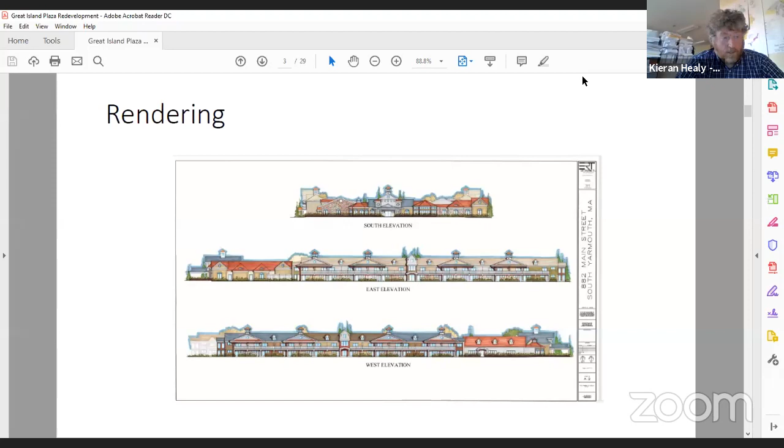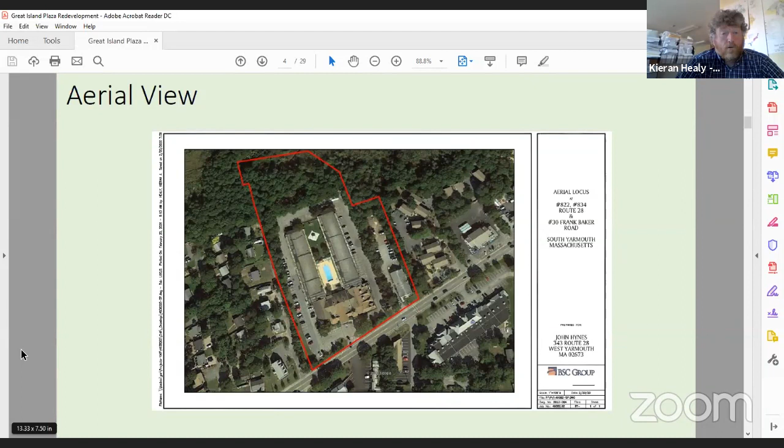If I go on to the next page, please. This is a general aerial locus of the property. You'll see the blue in the middle, that is the current 822 building. To the bottom right, still within the red area, is 834. And then on the back, the wooded area is the Frank Baker Road site. All 3 of these will be combined as one and will be treated as one going forward if the special permit is approved. The next slide, please, Kenny.

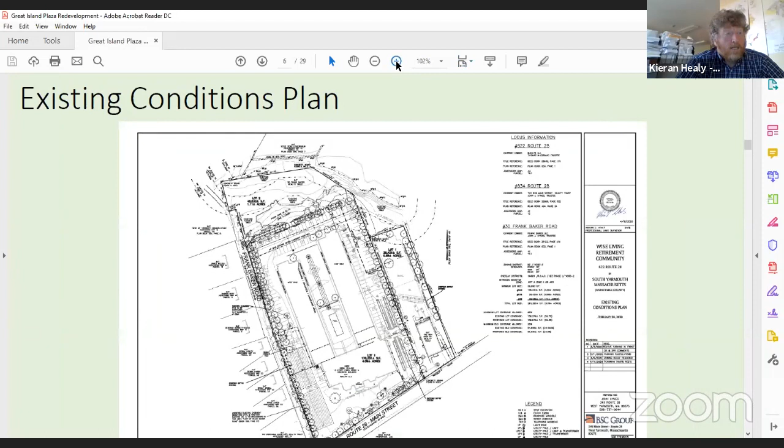This is the existing conditions. There are a lot of lines on this plan, and I'm sorry for that, but there's just a lot of underground utilities, a lot of different things going on subsurface here. The wetlands are delineated at the rear. Parking lot is the parking lot that exists. We're not extending the parking lot in any form going to the north towards the wetland. We are extending it approximately 2 feet on the west side towards Frank Baker Road. It will still conform with the 20-foot setback, but it just allows those parking areas to be full size on that westerly side.

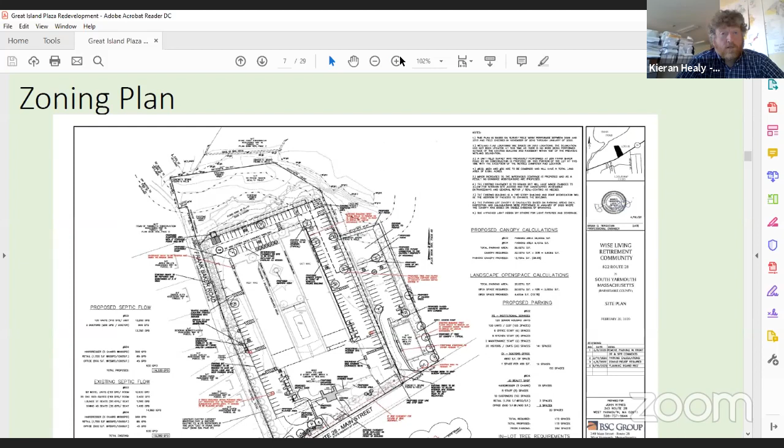This, I guess, here is the area where we've got the most visible improvements going on. The areas in red are, as we spoke at the last meeting, areas where we've specifically looked for some relief. If I start on the back left, Patty, and we'll just go around clockwise, make it easy for everybody. So the first red line you see back there basically is an overhang that we're going to put over the doorway to break up that line right there.

It is not enclosed, and as a result, that's one of the things that we will be looking for relief on. Going further south, you will see a red circle and then a further line with red text. That is the two areas where we're looking to get relief, where they're directly over a septic system. It is possible to put in the trees there, but it would be very close to septic systems and it would be difficult to maintain. So we're looking to get relief so we don't put ourselves in that position.

The next thing we talked about was the easement, all the way along. The requirement is to have a sidewalk running all the way along the property on Route 28. We'll be looking for relief in the future to not put in the sidewalk, but put in an 8-foot wide easement right now. Any of our plantings that we put in will be held back from that 8 feet so that they don't interfere with the ability to put in the sidewalk if the state were to widen the road at some stage.

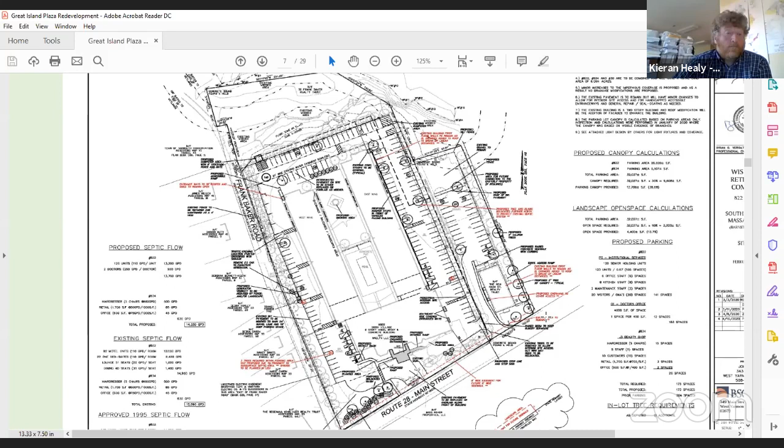All right, thank you. Just speaking of the water lines, one of the things that's been agreed is that sprinklers will go into the rear portion of the building where the living units are. So that's part of the proposal. Then if we go on to the next page, Guy, please.

So this is just showing you the subsurface utilities that are there. There's no real need to discuss them. There is plenty of drainage and the septic system. We're working with the state right now to get confirmation from them. They have preliminarily approved it, but we don't have anything in writing as of yet to maintain the existing septic system and the flow that goes with it. So that's this particular slide.

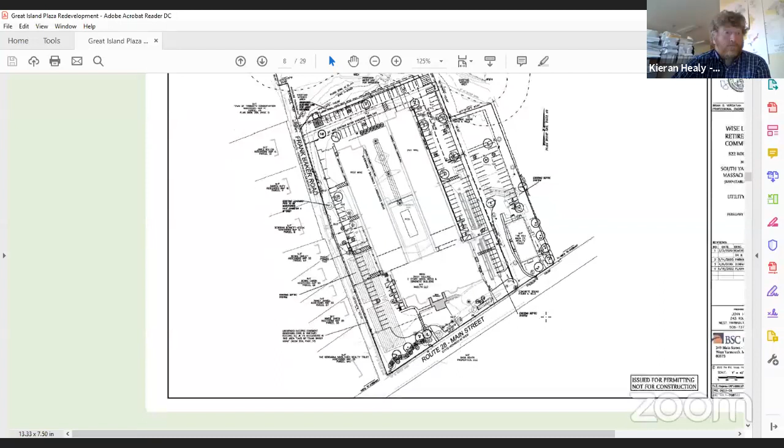And then next one, if I could, Guy. So the next one is some general details, the site planting plan, and the most important, I guess, would be the access for the fire department apparatus. The red that you can see in the center of your page right now is a turning template that we've used based on the town of Yarmouth's fire truck.

It's the ladder truck, so it's the largest vehicle, and the location of the entranceway should not interfere with that turning into the property. They can easily go in and take a left and go around the building that way, but we want to be sure that they can go around the building and go to the right as well. And that appears to be the case with this turning template based on the information that the fire department gave us.

South of that, you will see that there is a car, just an auto turn for a passenger vehicle that basically allows somebody to depart the vehicle underneath the porte cochere and then for the vehicle to drive out onto the main road without having to turn around or do any backups.

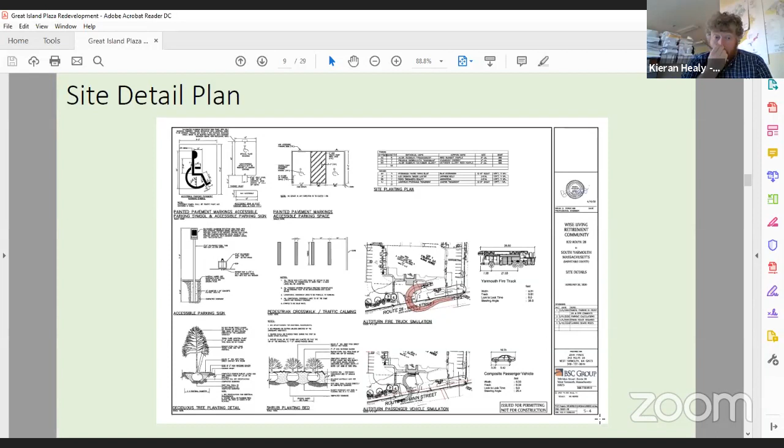If I could have you go back one screen there, please, Kenny. There is a cross connection, actually 2 cross connections, as Andrew had mentioned, between the 2 parcels here. One is for vehicular access down at the south end, and one is about 40-50 feet back, which is for pedestrian access between the 2 properties.

At the request of the planning board, we put in a stop sign and a painted line right where the two driveways meet, just for safety, to slow people down and make sure that they can get out and not just jump right out onto that.

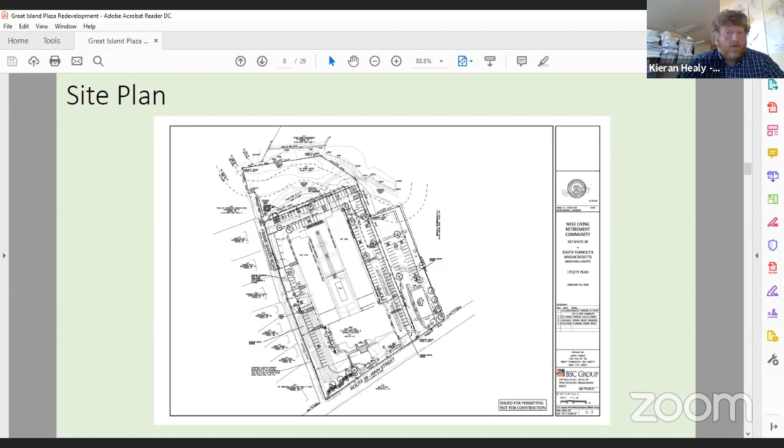Next slide, please. So here's the existing floor plan. You'll see that on the left-hand side is the front facing Route 28, and on the rear is the right-hand side. You can see that all the rooms are basically in the two wings of the building, and the restaurant, lounge area, pool area, and offices are all in the front section, basically for check-in, where the existing hotel has its main offices.

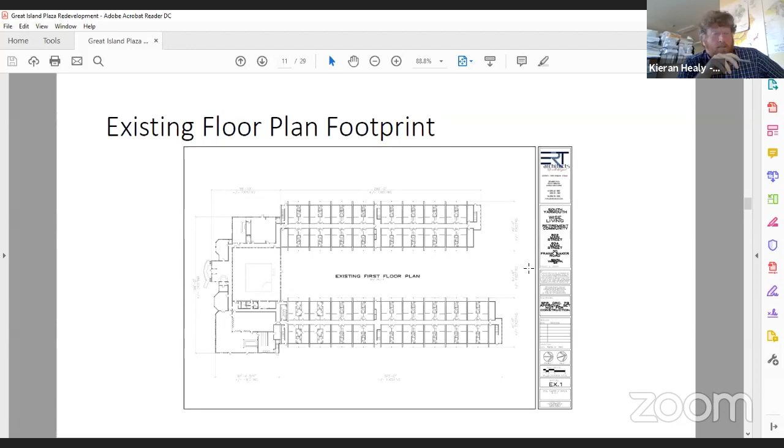You'll also notice that there are no elevators on this existing floor plan. If you could go on to the next one, please, Kenny.

This is a partial basement plan. The front of the building is up on the north side of the top of the screen, shall we say. These are existing basement areas that are on the building right now. They will be used for some additional storage for each of the individual units. The elevators that will be put in on the first and second floors will also go down to this floor and allow easier access.

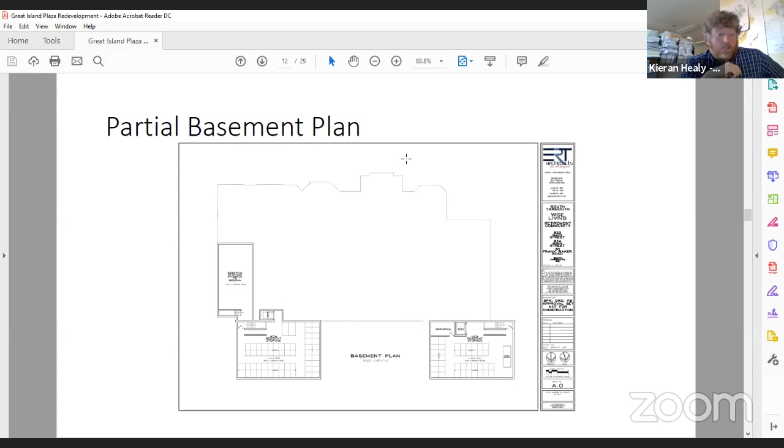So there's no need for carrying anything up by stairs. Everything can be just rolled right off an elevator and into a storage area that each individual unit will have. Let's continue, if we go on.

If we could go on, please. This, I guess, is important for the planning board to recognize, is that these are the types of units that will be here. You will see that the one on top is your typical studio unit, which is kind of the layout that's there right now.

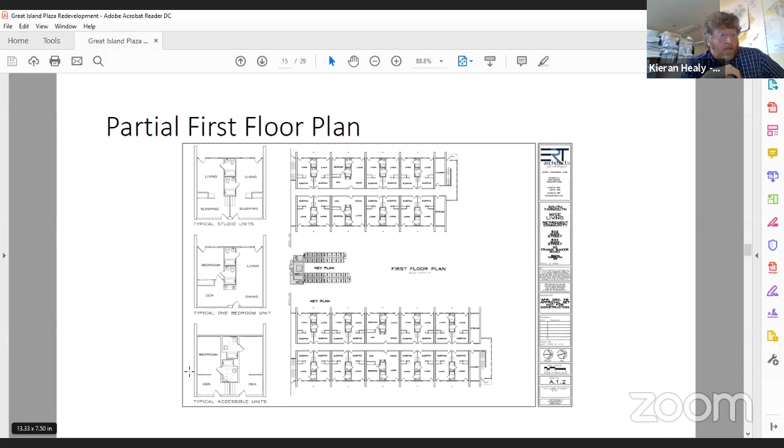The next one is the typical one-bedroom unit, where there will be basically the middle wall removed, and it will have two bathrooms in a one-bedroom unit. Then the ones below that are the typical accessible units, where everything will be, if not already, handicapped accessible when it's ready. So next slide, please.

Then the roof plan, as you can see, the entire two wings of the property right now are flat roofs. On the very north side at the top of the screen and the very south side at the bottom of the screen, here's where we're putting in those facade and roof lines to give the appearance of a standard roof line. Behind that will still remain flat, and that will be where the solar panels will go. Solar arrays will go on the flat roofs. The direction will be facing to the left, which is pretty much facing due south.

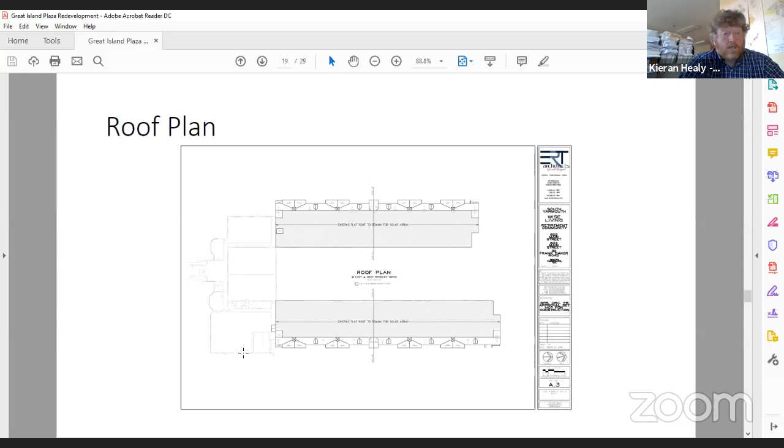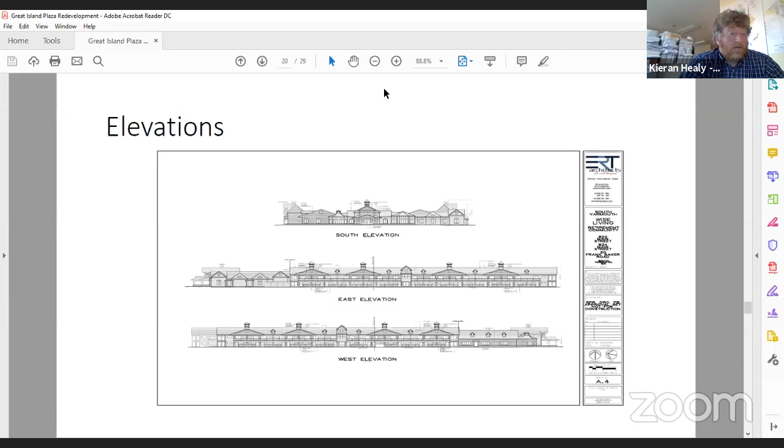Next slide, please, Gary. So here's the front of the building again, similar to what we had shown in our first slide, the rendering. The east and west elevations will now have railings along the individual units. You can see it better on this one, right here, below the typical gable.

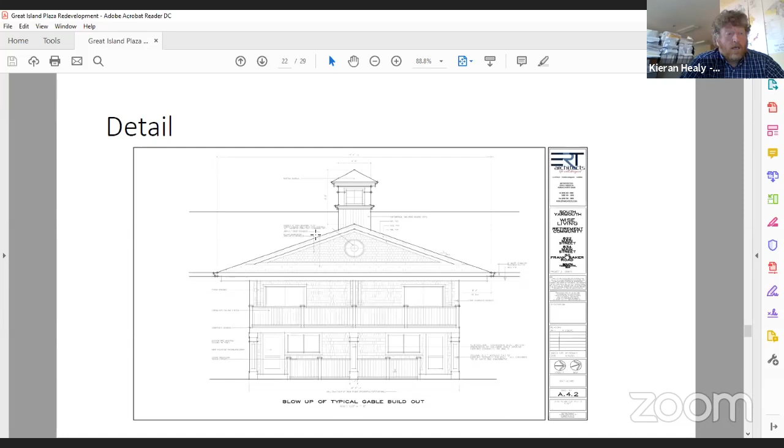These railings will primarily be used for safety, because some of the driveways are close to this, but it'll also allow each unit to have its own seating area outside if that's what's chosen. You can see the gable unit on top. Everything from that line north is going to be additional building, to decrease the overall length of the building, to break up those areas that require to be broken up, and to give it some more architectural character.

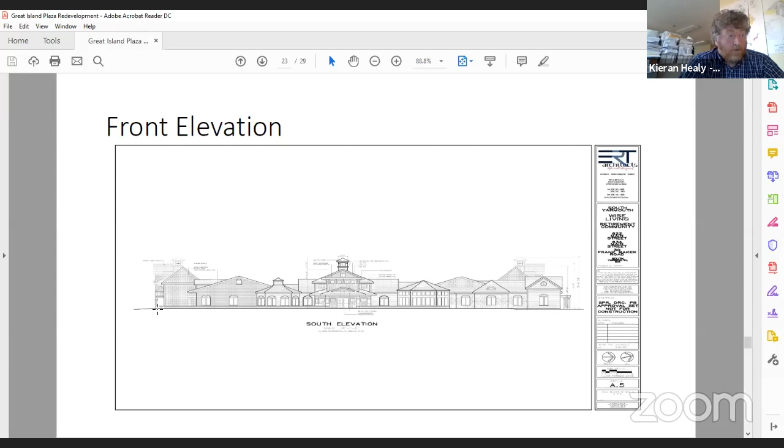Next, please. This is the front elevation again. It just shows you the areas. The front elevation is quite lengthy as it exists. There's no change to the distance from east to west, except for the area on the far right-hand side, where we're putting in those two small overhangs over existing doors to break up that area. And there is one also positioned on the left-hand side.

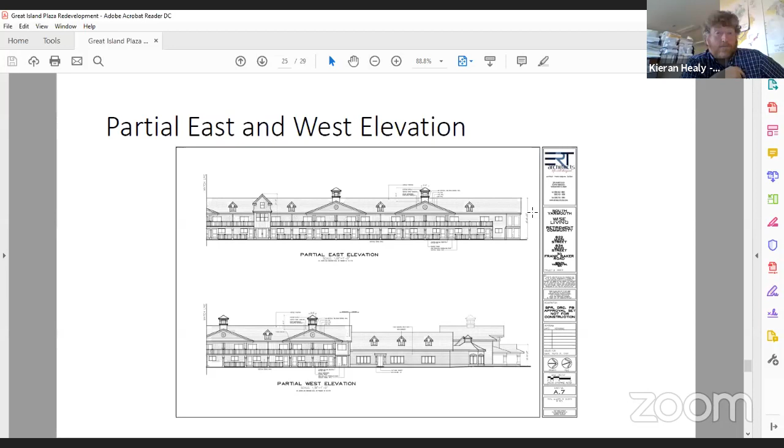Next, please. And this is the rear portions of both east and west. Again, you can see it's broken up with the dormers and gables, to reduce the massing of the building and the flat roof. Next, please.

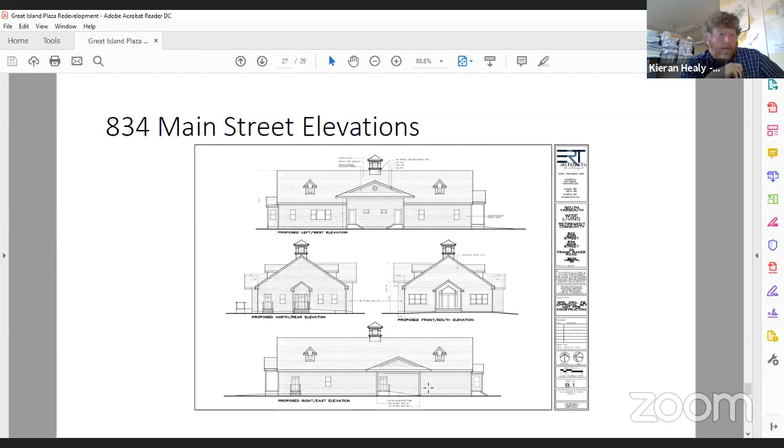Okay Kathy, I know you've got some comments in our packet. Yep. I think they did a good job with the submittal materials of trying to address the comments from the VCOD site plan review of the things that could be addressed at this particular time.

They did modify the landscaping plan along Route 28, made the berm a little bit more natural and not linear. They added the foundation plantings, and there's also a note regarding irrigation. They did add on to the architectural drawings the two porticos over the entrances by the restaurant. And they added notes regarding replacement or overlaying of certain areas of the pavement. They have a concrete sidewalk detail, and then they also added that note for the stop line and stop sign.

In addition to the special permit granting criteria that Andrew went over to begin with, there's also some additional criteria in section 414.3.3 that's included in the planner report for the board to consider when looking at their special permit. And I do think Andrew went over some of these items in his reasoning letter that he sent to you.

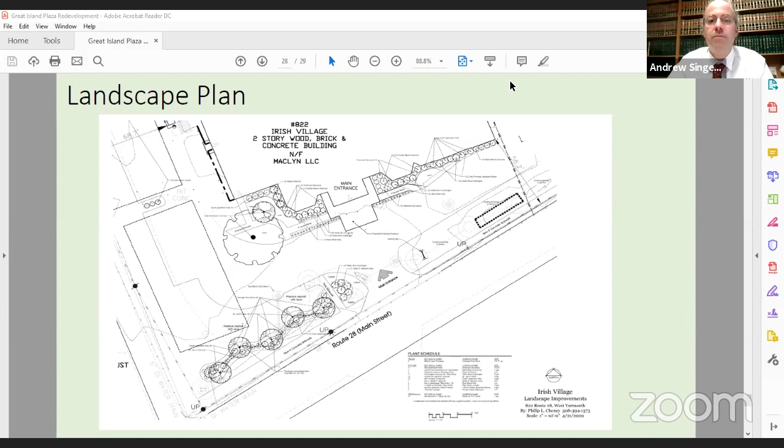Great, okay Kathy, public comments? Hang on a second, I'm just going to stop sharing. I do have a chat from Abigail Santos, a homeowner at 15 Frank Baker. She had a few questions regarding the plan for the nursing facility, which is not 100% nursing facility - will any of the construction expansion affect the pathway to the conservation area at the end of Frank Baker Road? Will the fence be extended to cover the lot known as 30 Frank Baker Road? I just want to be sure I'll still be able to access the conservation area without any difficulties.

If I could answer that - there was no intention to extend the fence line or to block anybody's access at the rear of Frank Baker.

Okay. Any other comments from the public, Kathy? I guess I would just say if anyone else is interested in commenting, or if Abigail would like further clarification on her questions, you can raise her hand. Right now I'm not seeing anybody's hands raised, or any further - oh wait, we do have Abigail who would like to speak.

I'm just gonna- Abigail, can you hear us? Oops, hang on. Abigail, I think you're going to have to unmute yourself. There you go. Can you hear us? Guys, hear me? Yes. Okay, how are you? Good, how are you? I'm good.